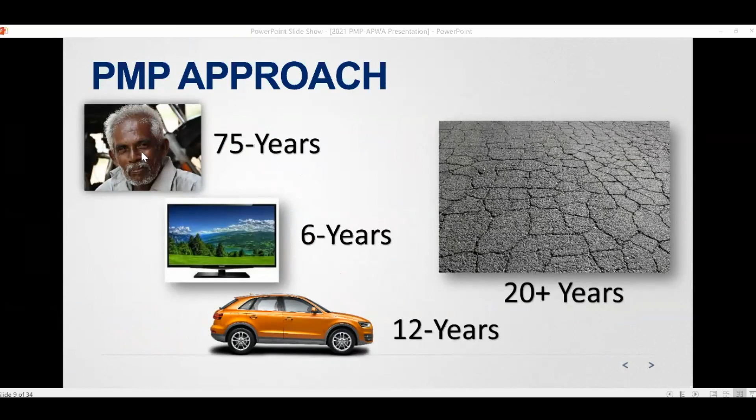Everything has a life expectancy. This is the average age, or what you can expect under typical conditions. Of course, there are a variety of variables that impact the actual lifespan. Some variables we control and others we don't. Pavements are no different. I'd like to first begin by talking about what life we can expect on average, and I repeat, on average, from our pavements, because the information that follows is theory-based.

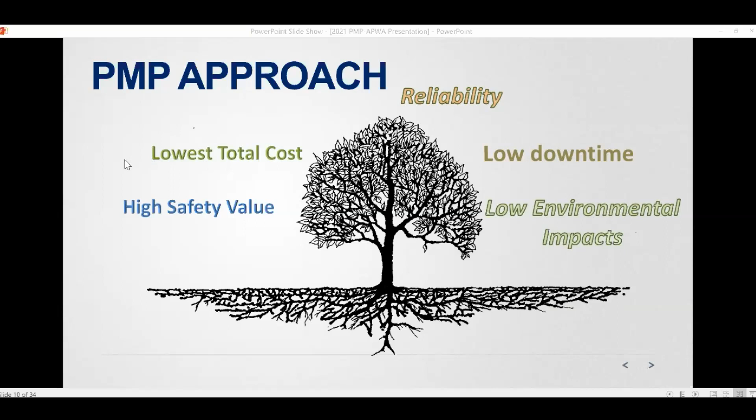Again, like all of our transportation assets, knowing the value the community receives from our pavements helps focus our resources. So as a reminder, with pavements, lowest total cost is the primary area of focus. As I go through the following concepts, I want to provide an understanding of how different maintenance approaches can affect a pavement's lifespan. This is a conceptual life cycle curve of a pavement. As the pavement ages, the condition decreases. Toward the end of its life, the deterioration is a bit quicker.

The recommended replacement condition that the Town of Castle Rock uses is an OCI, or an overall condition index, of 60 on a scale of 0 to 100, with 100 being new. The recommended condition rating for replacement is not a magic number that signifies catastrophe. It just means that the pavement is entering a phase that is more susceptible to an increased number of potholes or larger potholes. Of course, this condition is worse in the spring with our warm days and cold nights, known as the freeze-thaw cycle, which we're all intimately familiar with.

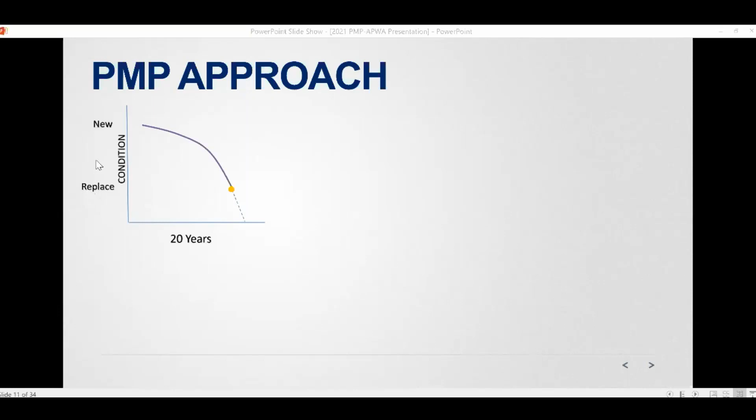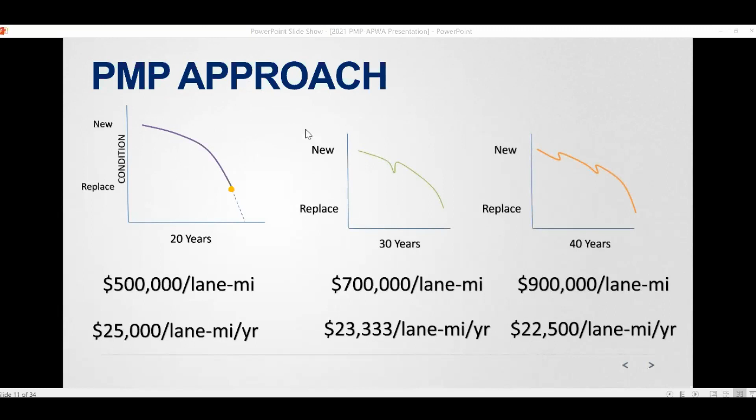We've identified that $22,500 per lane mile per year is the lowest or optimum cost curve under current market conditions. So this shows some iterations of the same curve. However, on the far right, it shows multiple iterations to try and extend the life cycle of the roadway to 40 years total before it requires a reconstruction. And that's where we come up with our $22,500 per year per lane mile as our optimum budget, which is pretty high.

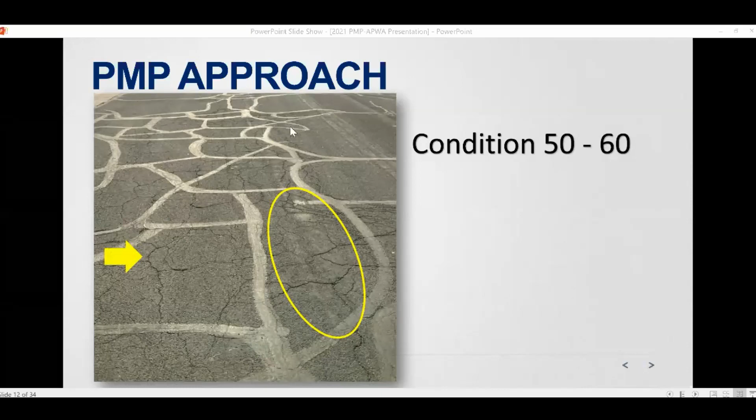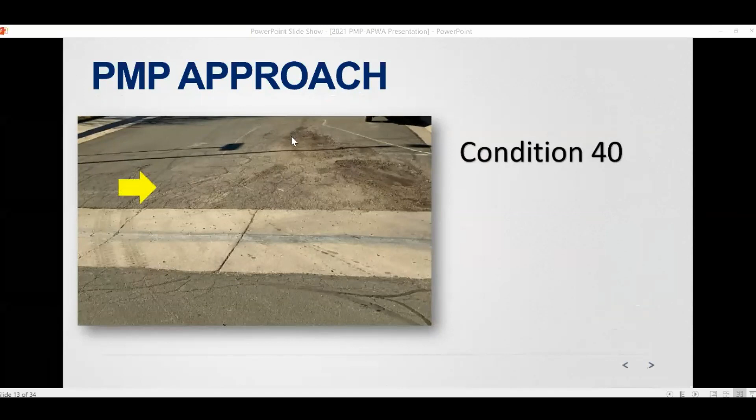Just to give you an example here, which should be very familiar to all, we got some alligator cracking indicating problems at the base level, and rutting, which is also showing some structural base weakening. So these are conditions under 60, which require reconstruction. Here's one that we put as an OCI of 40 with alligator cracking indicating some problems at the base level and asphalt material crumbling here. And then finally, here's a very low one. This is a concrete street, believe it or not, showing alligator cracking indicating some problems at the base level. And then concrete material is crumbling over here.

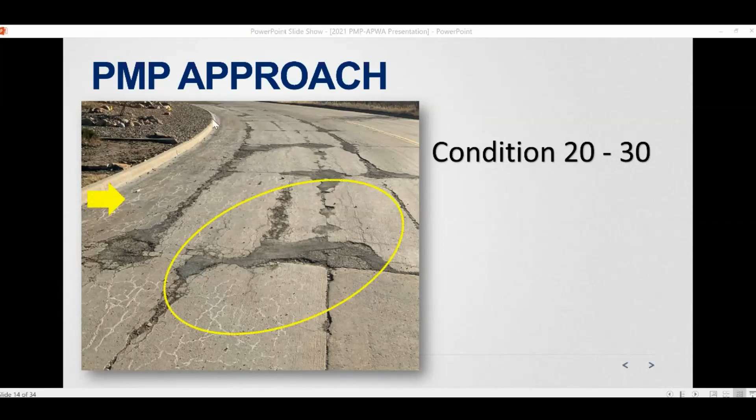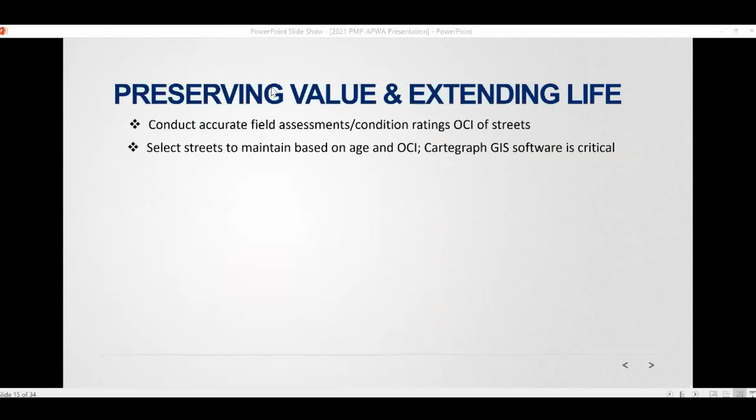So for preserving value and extending life, we conduct accurate field assessments and condition ratings, or what we call OCI, as I mentioned, of our streets. We select streets to maintain based on their age and OCI. And this is a really big deal. Cartegraph, our GIS software, is very important to our program. It helps our predictive analysis, and we could not accomplish near as much as we do without it.

We identify the distresses to know what we're dealing with on the streets. We do the right treatments at the right time. Don't be afraid to experiment. We use mineral bond treatments and fiber additives and other things. We do everything to maximize the budget. And of course, we monitor the results.

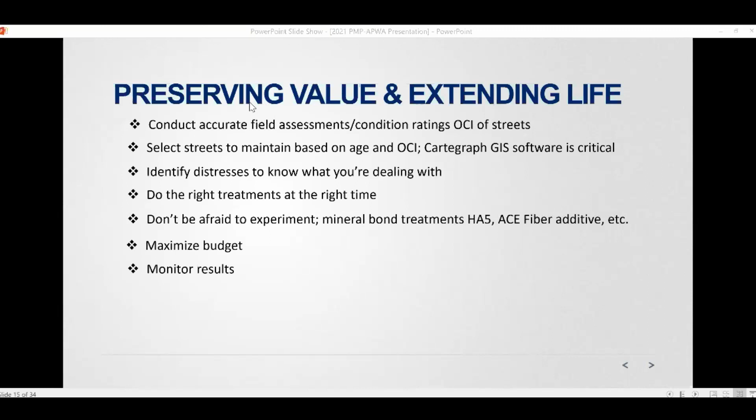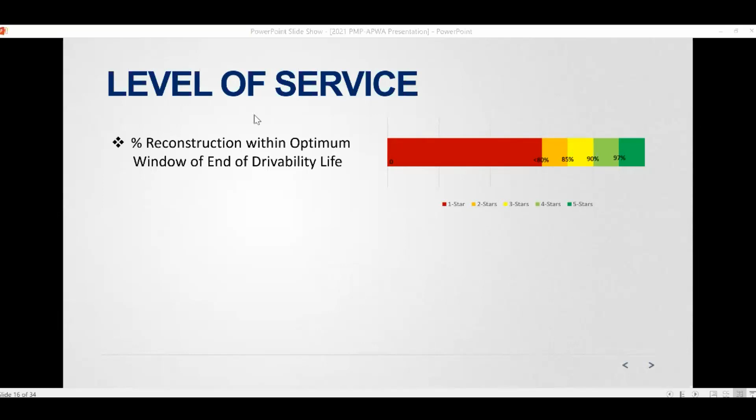For the level of service, it's another aspect of the PMP for our reconstruction programs. The level of service applied to pavements is the percentage of road segments that are being reconstructed in the optimum window of drivability life, meaning that once the pavement has reached its useful life, the town is budgeting and scheduling the pavement to be reconstructed. This is established with the town's life cycle curve.

I have an example of a life cycle curve that would apply to a typical local street. As part of the life cycle, preservation and rehabilitation treatments are needed to reach the lowest life cycle cost of the asset. It might be hard to see, but on the left, going vertically is the OCI, 100 at the high end. The red line is right about 50. And then left to right is the age from 0 up to 40 years.

With the proposed treatments in the PMP—crack seal, slurry seal, and overlay—we are working to stay on track with the recommended cycle. The reconstruction program addresses the level of service at the end. In blue you can see crack seals, in yellow slurry seals, in purple there's an edge mill, and there's a full mill in the orange or brownish color. So there's a number of treatments over the years which we attempt to apply on the cycle shown, in order to achieve our full 40-year life cycle, optimizing the program.

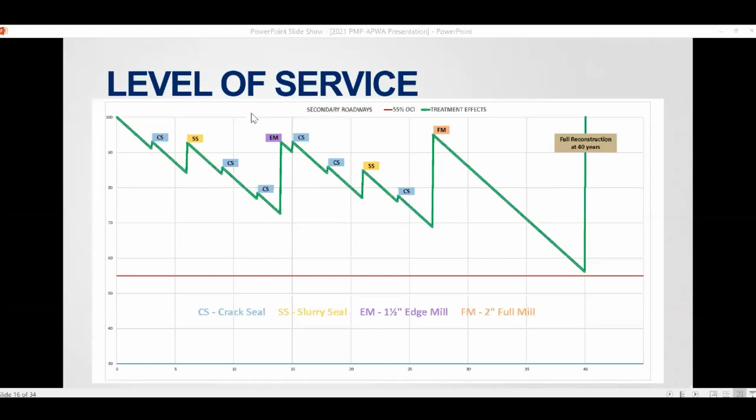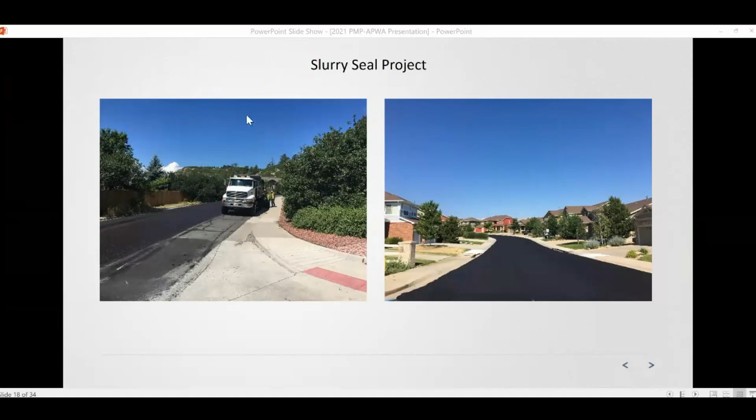To do this, the town employs the following treatments. Of course, like everybody, we do patching and crack sealing. We do standard slurry sealing, which differs from chip seal. And we do a lot of asphalt mill and overlay, one of our most common rehab treatments, consisting of removing and replacing asphalt.

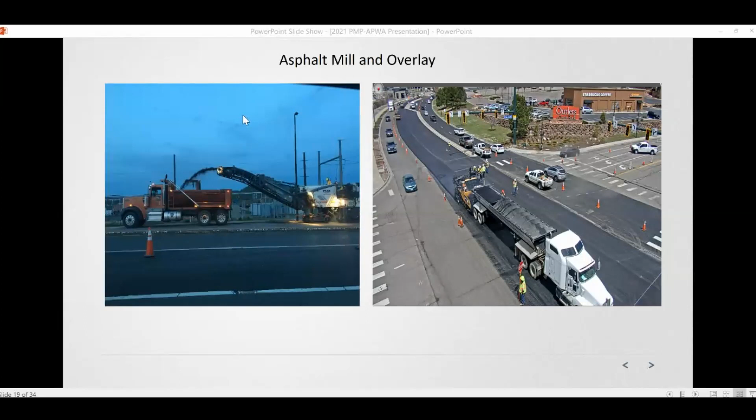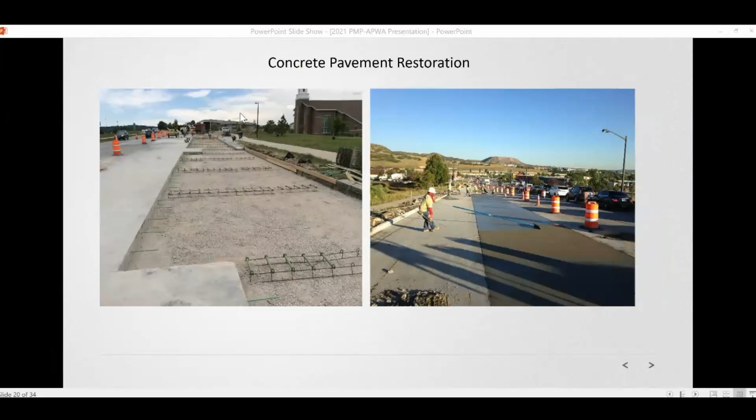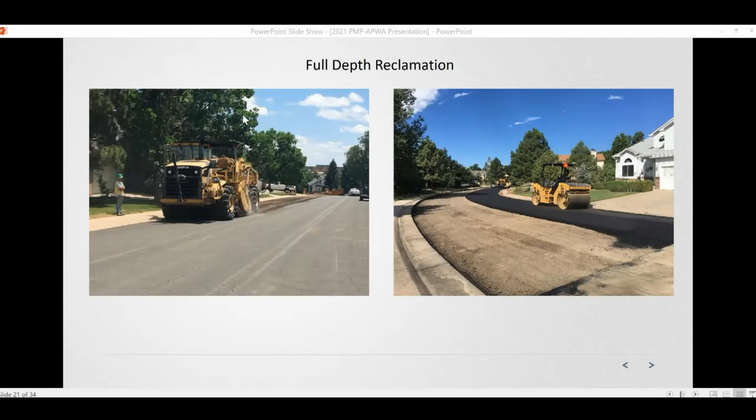Then we get into concrete pavement restoration, which is a common rehab treatment for our pavements. We remove panels and pour back new concrete, and we commonly follow that with diamond grinding to improve surface smoothness and help the pavement last. Then we have full depth reclamation or reconstruction—pretty much what it sounds like: we take out the old pavement and put new back. This has been a very cost-effective procedure for the town. Finally, curb, gutter, and sidewalk repair is another treatment the PMP does, and this coincides with the pavement treatments.

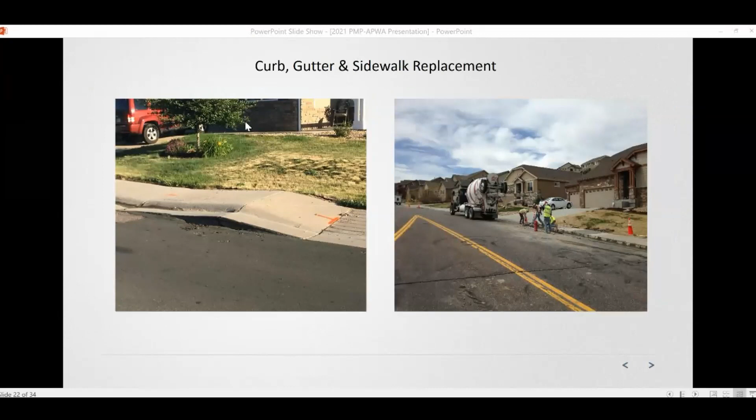As an overview, the PMP and reconstruction programs fall in line with the department's SAMP, as previously mentioned. In addition to the treatment types—let me go back a second—there is a regionalized plan to address street maintenance. All secondary streets are within 5 regions, and all primary streets are a standalone network, not region-based.

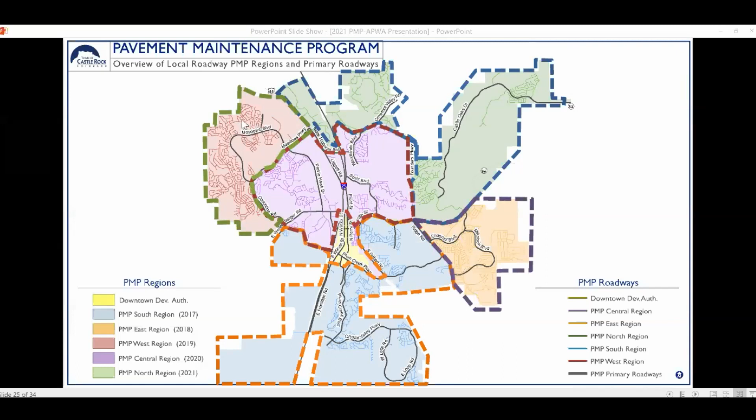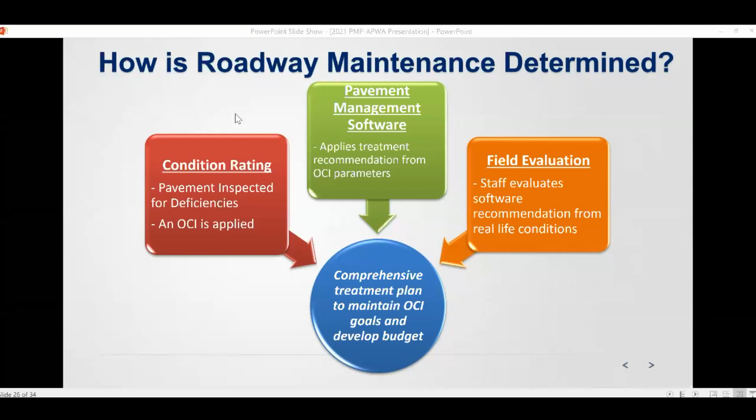So how is roadway maintenance determined? The first component is condition rating, which is the field aspect of determining an overall condition index, OCI. The next step is having the pavement management software, Cartegraph, recommend a treatment from the OCI parameters. Then we evaluate the software's recommendations to ensure the treatment makes sense and is right for the location. All that combines to create a comprehensive plan to maintain the program's OCI goals and develop budgets.

Through the summer, we execute the program. We also build the budget for the next year with town staff. In August and September, inspectors perform field assessments for developing quantities for the following year's PMP. In October, we finalize the PMP projects per the budget. In November to December, we're developing and advertising bid packages. By December and January, we've got our pre-bid conferences and bid openings underway.

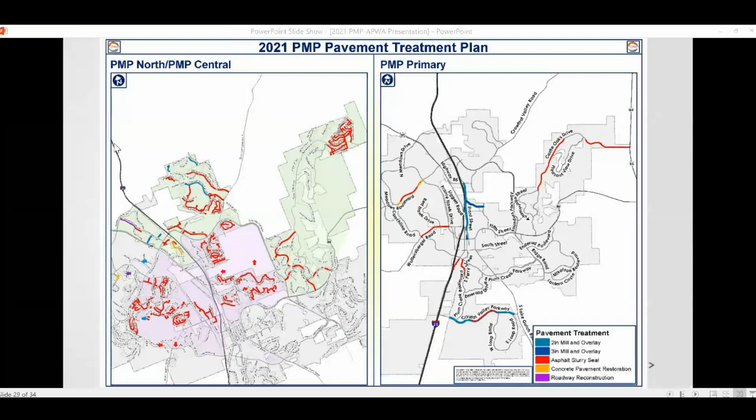Transparency. Defining and reporting our service levels assists us not only with being accountable to our community stakeholders, but also greatly assists with assessing potential changes.

Our strategic asset management plan reinforces this, and the development of our report card, which we do every 2 years, was designed to provide transparency and assessment of risk.

So finally, I'd like to share some lessons learned and innovations. First, I'd like to point out that APWA accreditation of the town assists greatly with developing our public works SOPs. That also dovetails well into our asset management program.

Skilled visual observations by a staff of 4 inspectors, in lieu of electronic data collecting systems, is working very well. It's very hard to replace the judgment of the eyes of the field inspectors.

For the last 3 years, we've really calibrated the program and have aligned very well with our GIS systems. So we're finding that the OCI gained by the inspectors is now starting to calibrate and match up with what the GIS predictions are showing.

Coordination for crack seal a year ahead of the primary treatment is a good idea, to get out there and get those streets crack sealed beforehand.

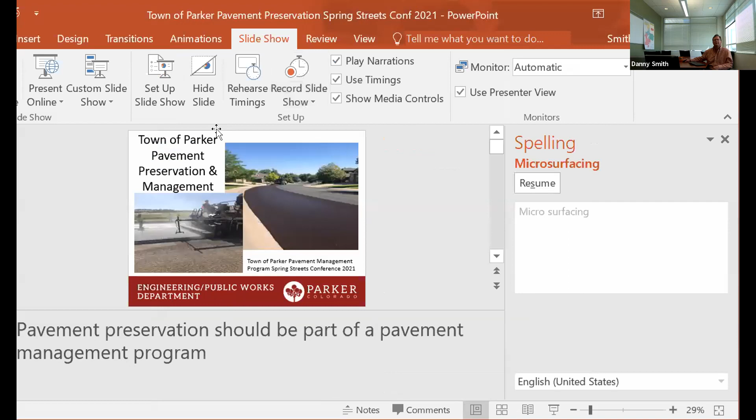Share my screen and make sure everything's good. Sorry, can you see my screen yet, Renee? We can see the screen, and you are opening the presentation. There it is, it's good.

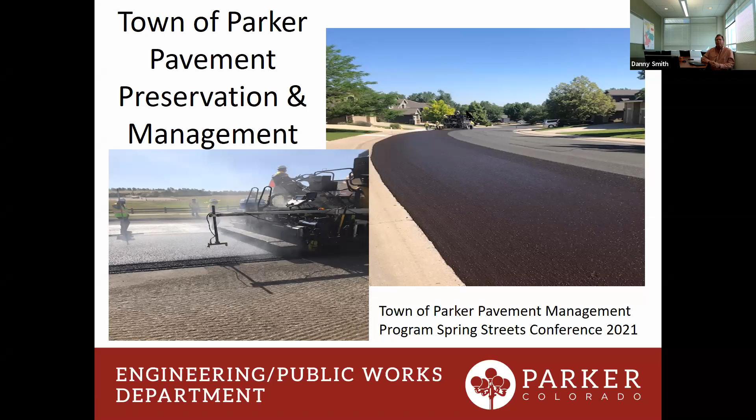All right, good morning, everyone. As Renee mentioned, I'm Danny Smith with the town of Parker, and I am going to talk about the town of Parker pavement preservation and management program. Like Brian, our program does include resurfacing and reconstruct. I'd like to start out by saying this is the way we do it in Parker - it's not the only way, and there probably is a wrong way, but I think if you're doing some pavement preservation, you're on the right track.

Town of Parker, we have currently approximately 534 lane miles that we maintain. 87% of those are asphalt and about 13% concrete. Our current overall pavement condition index is a 76. I also wanted to add that we are responsible for 20 plus town parking lots.

So we do active preservation on those as well. And then the infamous graph that shows the proper time and the benefit of doing preservation and maintenance on your pavements.

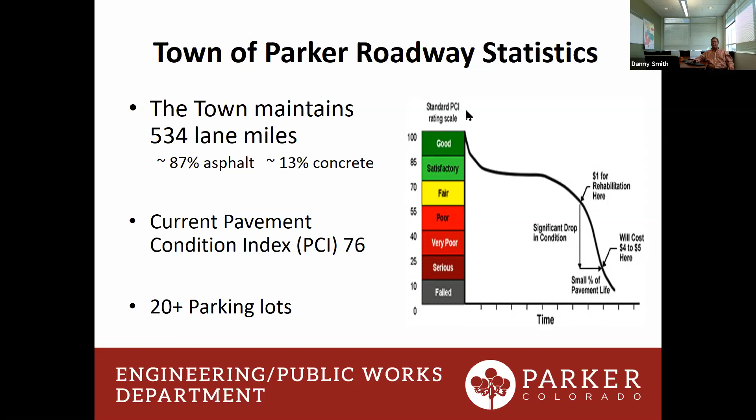Of our 534 lane miles, 50% are local or residential streets, so that is where quite a bit of our effort is focused. We are resurfacing, reconstructing, or preserving about 15% of our network annually.

Our program is currently based on a time interval with consideration given to the condition, the overall pavement PCI score. We currently collect that data every 5 years. For those of you that have done that, it's an expensive endeavor to contract, and it takes a bit of time. I'm going to talk later—we're looking to go to a different collection method in the future.

Town of Parker has had a formal pavement preservation program for about 7 years, and by formal I mean had an actual plan going into a year. There was some preservation prior to that, but it was random and not really an actual program or plan.

Our program is primarily chip seal and slurry seal, although we are starting to integrate some additional preservation methods like rejuvenation, seal coat, and microsurfacing. And we do and will continue to resurface streets as part of the pavement management program.

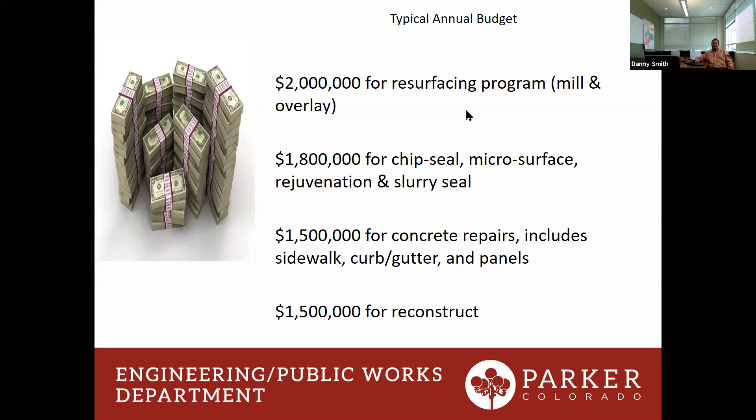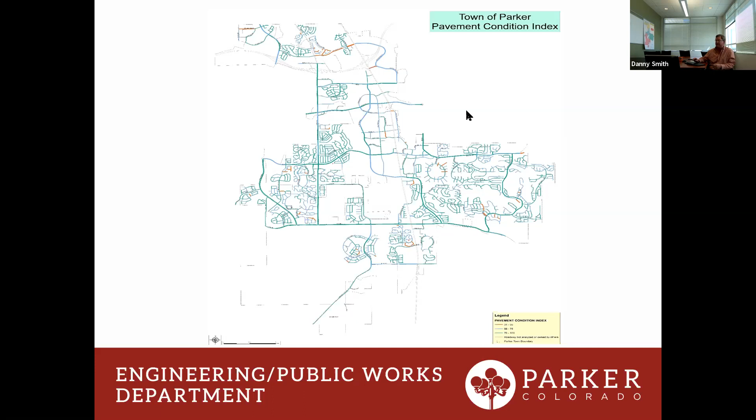We look at pavement preservation as a way to extend the life of the pavement, increase the return on investment, and also limit disruption to residents.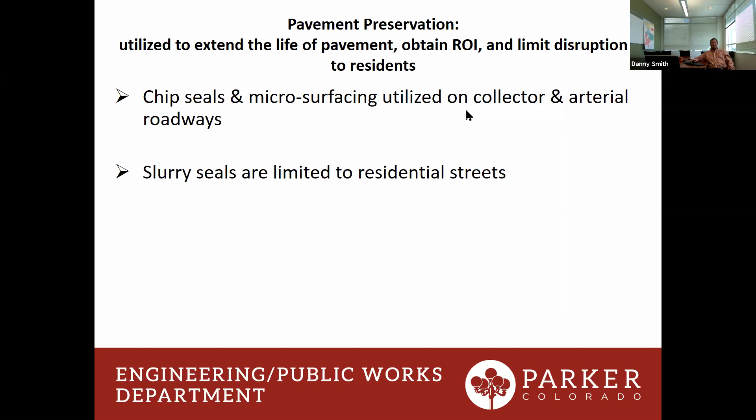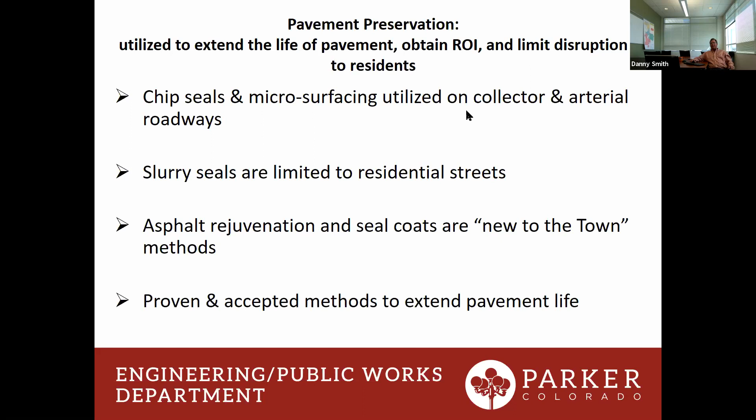So we use chip seals and microsurfacing on collector and arterial roadways. Slurry seals for us are limited to residential streets. Asphalt rejuvenation and seal coats, while new to the town, they're not new methods—they are proven, and we're starting to integrate those into our plan. All of these are proven and accepted methods to extend the pavement life.

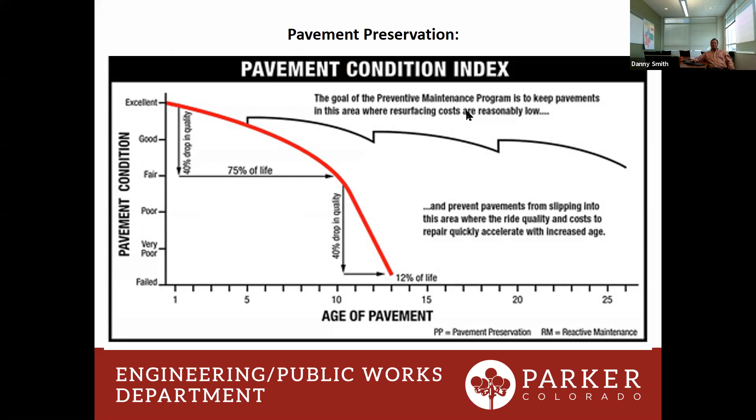Again, another look at the graph. The more money you spend upfront in maintenance or preservation will save you money in years ahead.

So right now, chip seals and microsurfacing, we're at about every 5 years, reapplying or applying that treatment. The same with slurry seals. As I mentioned, we're on a time-based program right now. So if something we slurry sealed in 2020, we expect to apply another slurry seal in 2025.

Rejuvenation and seal coats, again, these are fairly new to us, but we're anticipating every 3 to 4 years. They are a lower cost preservation method, so we can afford to have that return interval be a little less than the slurry seal or chip seal.

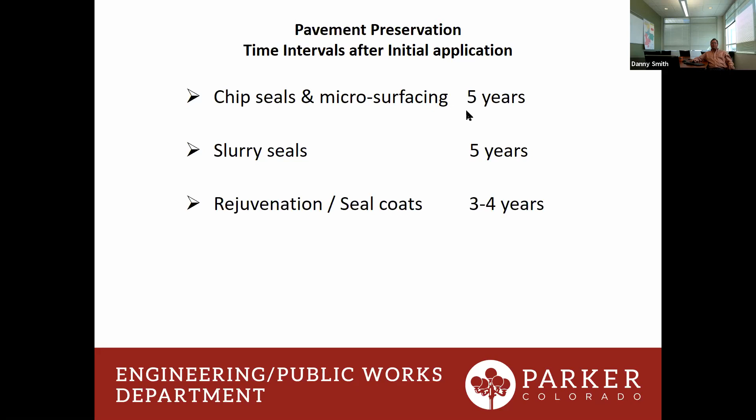And then Brian mentioned this as well—we have completed some grind saw seal projects on our concrete streets. I anticipate we'll be doing more, but that's about a 10-year return interval. And then resurfacing, we would like to get 30 plus years out of a pavement before we do a mill and overlay.

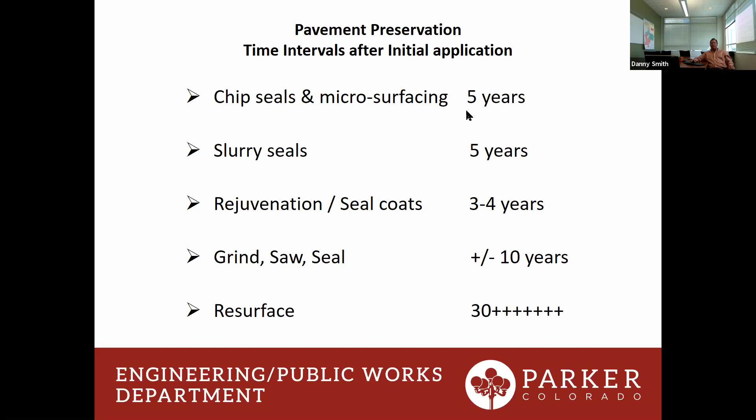As I mentioned, slurry seal, we limit this to residential streets, and we're doing plus or minus 50 lane miles annually.

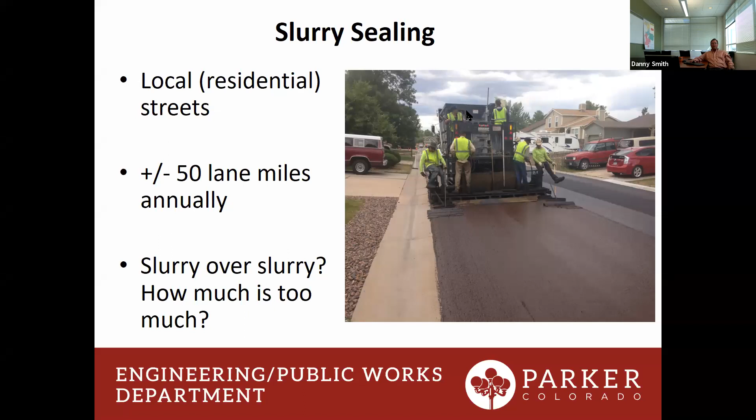One question that we're going to have to answer, and there may be an answer out there already, but this is something that keeps me up at night: slurry over slurry, how much is too much? How many years can we apply a slurry seal over a slurry seal continually before we have to do a mill and overlay, a reconstruct, or something different?

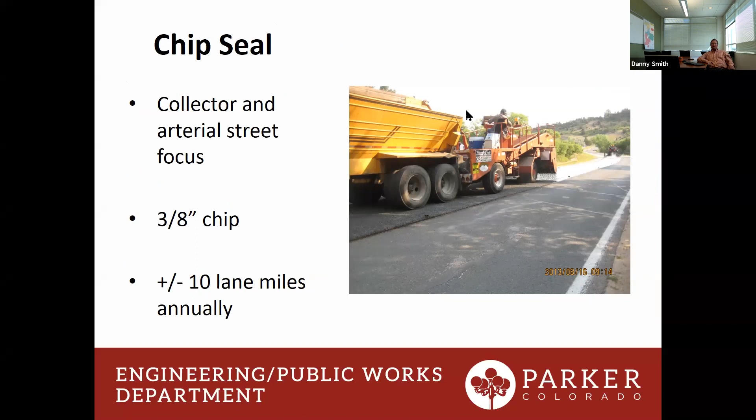We still do chip seal, although it can be a problem for us and has been. At this time, I anticipate still doing it, but I'm always looking for new alternatives. We use a 3/8 chip. These are on our collector and arterial streets. We do about 10 lane miles annually.

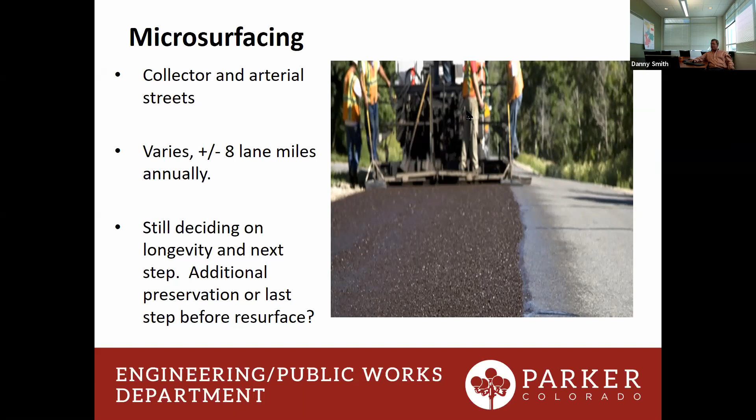Microsurfacing, we have done a little bit, and we're going to do some more this year. It's applied in a similar manner to slurry seal, just a little more robust for collector and arterial streets. We're looking at about eight lane miles annually, and we're still deciding on the longevity and next step. If we put a microsurface over a chip, do we have room for additional preservation, or is this the last step for resurfacing? We'll know in a few years and be able to tell you that.

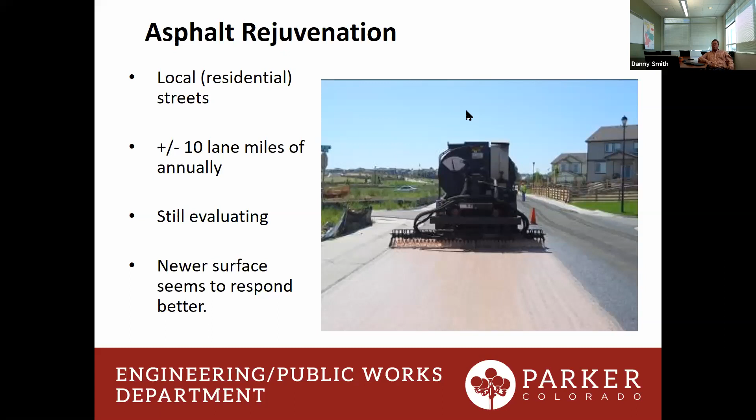Asphalt rejuvenation, we have experimented with a little bit. We like the results, and we're going to do a little bit more this year, about 10 lane miles. This will be on local or residential streets. As I mentioned, we're still evaluating. Asphalt rejuvenation needs to be on a newer pavement, so we're looking at the 3 to 4 year window for the first application, and then that same time period for the second application.

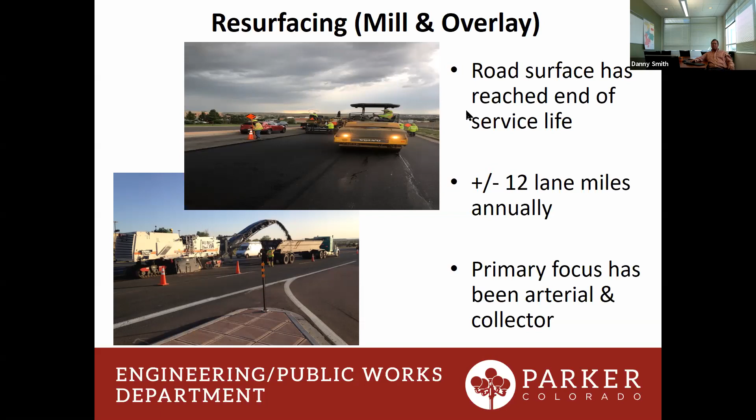And as I mentioned, mill and overlay. So once that surface has reached the end of the service life, then we're going to mill and overlay about 12 lane miles annually. Our primary focus thus far has been on our arterial and collector, although I expect we're going to be jumping into the local street resurfacing here in the near future.

One approach we're taking is that on our arterial and collector streets, we're going to be using SMA, or stone matrix asphalt. Some people call it stone mastic asphalt. It's been about 25% more cost for us than standard asphalt, but we expect a life cycle of 50 to 100% longer than HMA. That may be a little optimistic, but we're going to try it. We're not the first in the Denver metro area, there's quite a bit of SMA placed annually. SMA is more resistant, not completely, but more resistant to cracking, rutting, and potholes.

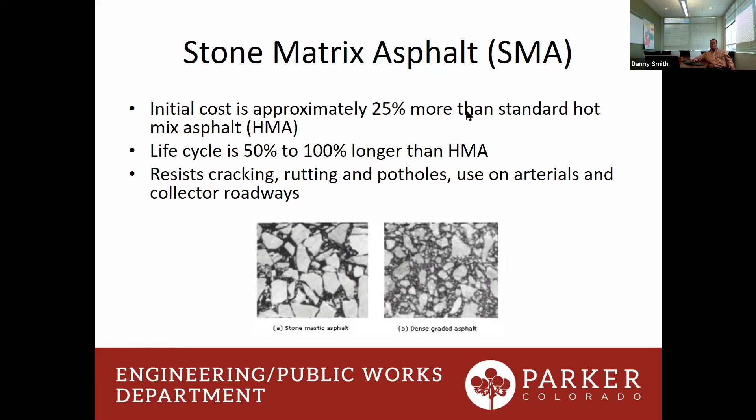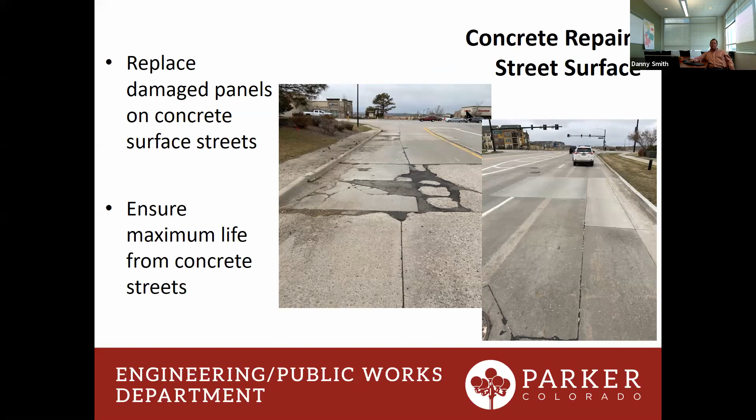Concrete streets. 13% of our streets are concrete. As part of our preservation program, we replace damaged panels. We want to get the maximum life out of those concrete streets as well. And we have completed some and will continue to do diamond grind and saw seal as part of the preservation for concrete streets.

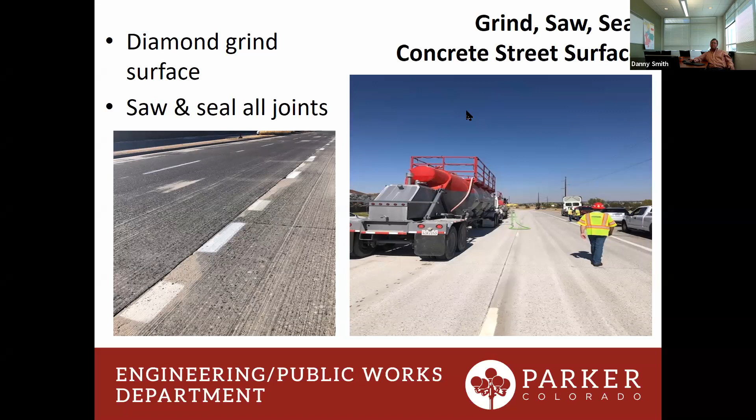We do reconstruction every year. This typically includes the removal of the distressed pavement to be replaced with a composite asphalt pavement section. So when we do a reconstruct in Parker, we're not only removing that distressed pavement, we're also doing something, either removal of the native base and placing back an ABC, an aggregate base course, or some kind of treatment of the native base, up to and including using geogrid to bolster that. When we do a reconstruct, all the assets, including curb ramps and pavement markings, are updated to current standards, and that's true with any of our preservation as well.

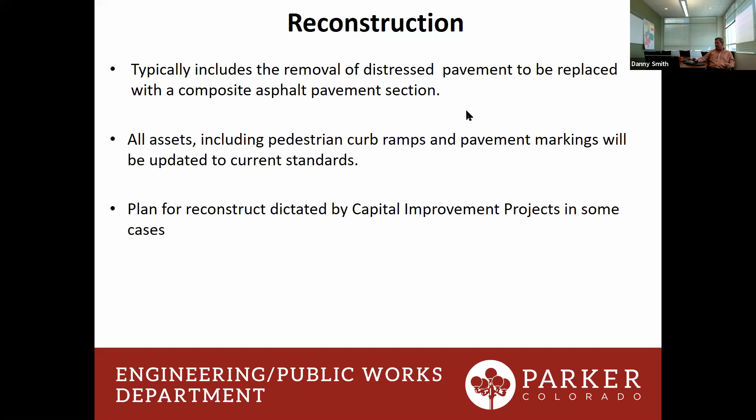A lot of times our reconstruct may be dictated by a capital improvement project. So for instance, we have a street in town that we're currently adding another bridge span to, and for that project, the reconstruct will include the street leading to and from the older bridge span and the new bridge span.

Our most recent reconstructs have been the removal and replacement of concrete surfaces. Our concrete streets for a long time did not have any preservation other than panel replacement, so they deteriorated to a point that reconstruct was the smart move from a budget standpoint. And we replaced those with asphalt.

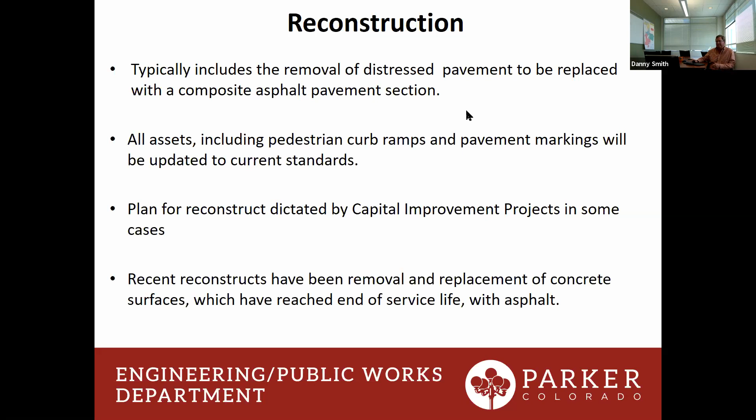Our town staff do quite a few maintenance tasks for us: crack sealing, large crack repair, patching, concrete repairs. These guys are vital and an integral part of our pavement preservation program, and it would not be successful without the work that they do. We're currently working one year ahead of contracted preservation, so if we have a street slated for slurry seal or chip seal in 2022, those guys will be working on patching and repairs on that this year.

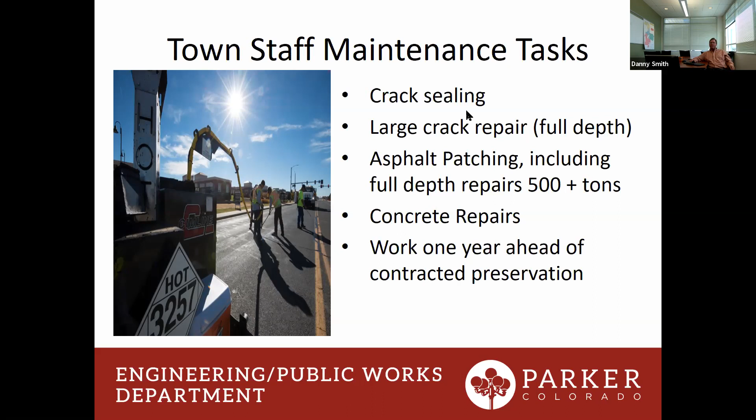This is a map of the town's 2021 maintenance program. It includes all of our construction activities and some work to be performed by CDOT. As you can see, we have our CIP projects, our reconstruct, select concrete replacement which is panel replacement, the mill and overlay, chip seal, rejuvenation, microsurfacing, slurry seal, and concrete spot work. The concrete spot work is sidewalk, curb, and gutter. And again, those areas they're working on in 2021 are areas that will be resurfaced or receive a preservation treatment in 2022.

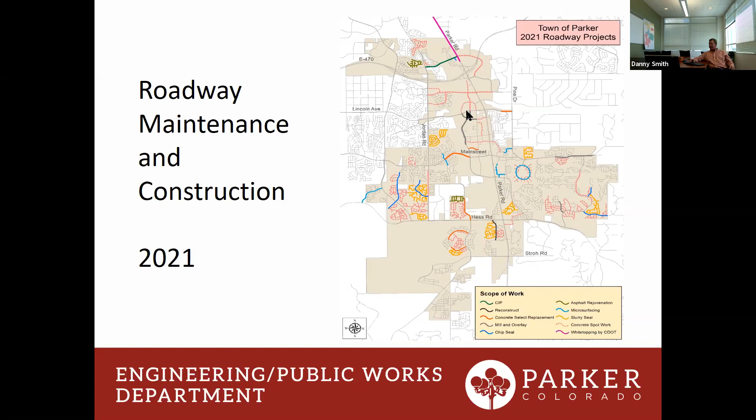So I wanted to talk to you about some of the things that you need to be aware of if you don't have a preservation program and are starting one or in the early stages of one. Chip seal will shed, and as Brian mentioned, that material will go all kinds of places. Fortunately, we haven't had a lot of windshield claims, but we do see a lot of it on the sidewalk. This is an extreme case. Don't pretend that all chip seals shed this much. This is an extreme shed, but application temperatures matter. So the timing of your application is very important.

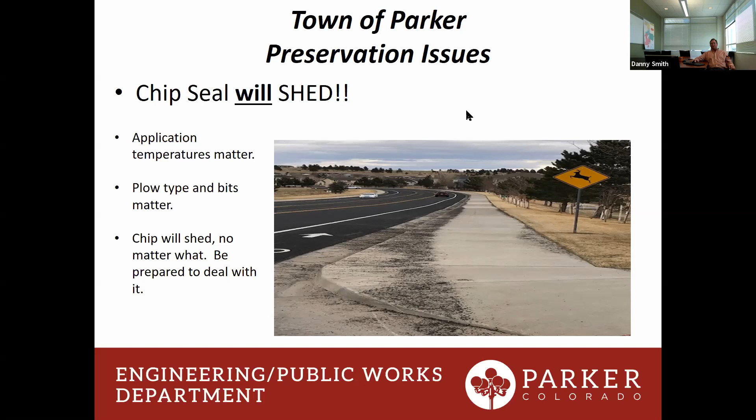In my opinion, plow type and bits matter. Pressure down plows wreak havoc on chip seal, in my opinion. And no matter what, chip will shed. So you need to be prepared to deal with that.

Cracks are still there and will reflect even when filled with a crack seal material, be that mastic or traditional crack seal. The full depth repairs, where you can actually remove that crack and go back with new asphalt, seem to hold up better under the preservation treatment. So a lot of this will be in residential under the slurry seal. Those cracks about a year later will reflect, even if filled with crack seal material. And I don't know about you guys, but I'm always amazed when I get a call about there's a crack in my street. There seems to be cracks in every street.

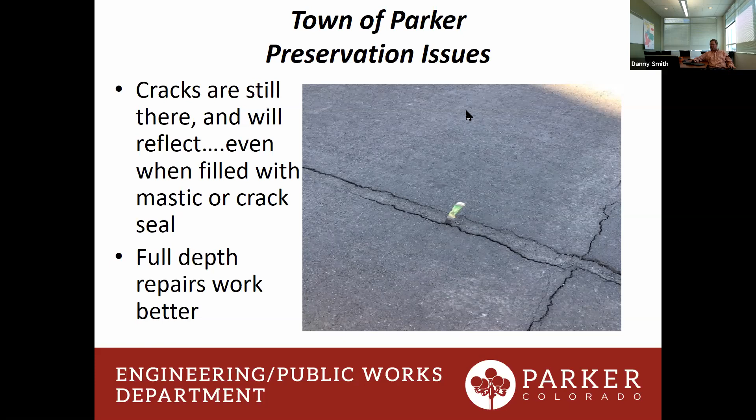So some other issues and concerns. It's important to manage expectations with preservation. Preservation is not new asphalt. So a lot of residents, especially with slurry seal, slurry will shed a little bit like chip, but they don't understand what they're getting. So it's important to manage expectations about what preservation truly is. Educate your stakeholders, and I'm talking about council members, I'm talking about politicians in your community. Make them your advocate, explain what preservation is, explain the benefits of preservation and why you're doing it, and it will make your life a little bit easier on the back end.

And this one, people will adjust to long-term work zones. Preservation is generally a short-term and moving operation. Those same people will lose their minds during short-term rolling operations. So if you're doing a chip seal on an arterial roadway, be prepared and plan for it, because people just have a hard time with moving work zones.

Some other things, ADA ramps. So if you're doing a resurface or a chip seal, you have to update those ADA ramps. So I would plan on that. We update typically with the slurry seal as well. We just go ahead and do them, and that way we're done. But we spend about $40,000 annually removing perfectly good curb ramps to replace them with minor changes.

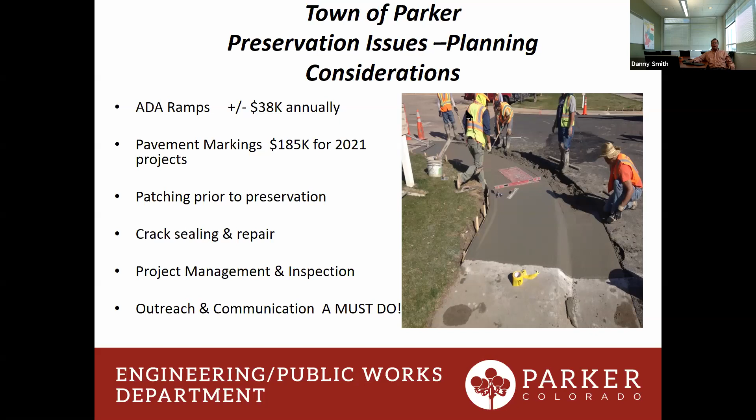And then finally, outreach and communication, a must do. So it's very important, and again with slurry seal in the residential, that you let people know what's going to happen before it does. We also have golf carts available for our residents, but still, that outreach and communication, it never fails. Two people every year are going to be moving on the day that you want to do a slurry seal on their street. Garbage pickup is impacted, and there are people with special needs that need to be considered as well.

So for the future, Town of Parker, we really would like to shift more to a PCI-driven program, so the condition index program, rather than the time interval. And that's something that we're looking at and working on.

PCI data collection, timing, and methodology. There's more than one way to do this. We have been looking at some artificial intelligence programs and evaluating those. And I think we're trying to adopt one and give it a try, where we can collect data with a smartphone just driving the street, and have that data available a few hours after we go collect it. And it's at a reduced cost of the traditional contracted method. The other option, as Brian mentioned, is to train staff to go out and do that data collection.

Continue to evaluate new preservation methods. It's not like there's new preservation methods that come out every year, but there are some new methods developed, and they are new to us. We did chip slurry and stuck with that for a long time, and now we're sticking our neck out a little bit and trying some different things.

The timing of application, sooner rather than later. And by that, I mean, instead of 5 years, should we be putting that first preservation on at 3-4 years, or can we wait a little bit longer? One of our goals, and I'll get to that. So what will SMA mean to our preservation program? We're hoping that we get a little bit longer life and can delay that first treatment, and delay the total number of treatments over the life of the pavement.